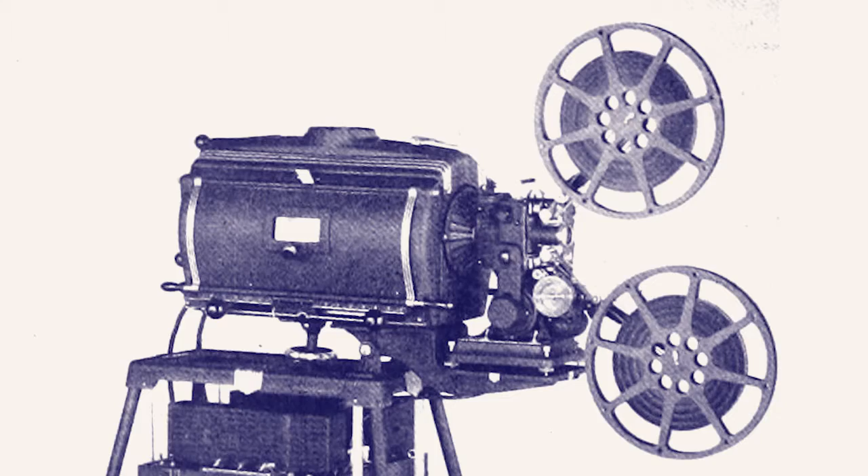Places of exhibition included meetings of local community clubs, schools throughout the community, factories of all types, and movie theaters or public auditoriums that were equipped with 16mm projection equipment. If the film was shown at a theater, it would have been incorporated into a movie program and exhibited as a short subject prior to a feature film.

Individuals who attended screenings of the films were also treated to a complimentary souvenir booklet which featured colorful, vibrant artwork depicting scenes throughout the film to help summarize it.

Since the film was made specifically by the Standard Oil Company of Indiana and not by any of the other Standard Oil companies, it was only exhibited in the Midwest states where the company marketed and sold their gasoline, which included Indiana, Michigan, Illinois, Wisconsin, Minnesota, North and South Dakota, Iowa, Kansas, and Missouri. By 1948, the Standard Oil Company of Indiana also acquired Montana, Wyoming, and Colorado to sell their gasoline in.

Unfortunately, individuals who lived outside of these states were deprived of seeing this masterpiece. However, the general public and Standard employees in the Standard Oil Company of Indiana's territory were in for a real treat, as this was a wonderfully made production which contained all kinds of showmanship tricks commonly found in the films made by the Jerry Fairbanks studio.

The Jerry Fairbanks studio was owned and operated by a rather fascinating gentleman named Jerry Fairbanks. Mr. Fairbanks was a very ambitious filmmaker, a showman, and a man who contributed greatly to our motion picture heritage. He was also a licensed airplane pilot, who would frequently fly to do location scouting for his films, shoot footage, and also check up on his various film shoots being done on the North and South American continents.

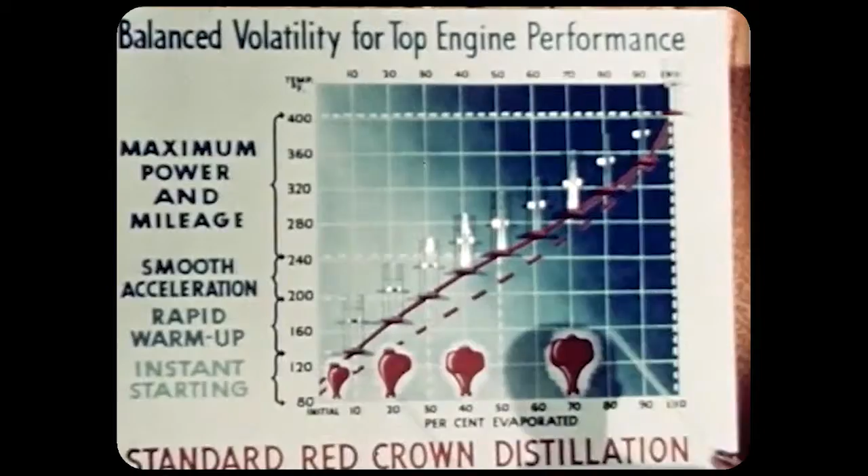Molecules with film personalities are at work telling the inside story of modern gasoline. They appear in sound and color in the new 16mm picture completed by the Standard Oil Company of Indiana. Audiences seeing the picture will come away knowing how gasoline is made, what gasoline is, how it performs, and how specialized it has become in supplying greater and more economical power for automobiles today.

Other trade magazines, such as Chemical News Parade, thought very highly of the film, especially the cartoon sequences. After viewing the film on my own, I can honestly agree with the trade ads that while the film is great, it's really the cartoon animation that steals the show.

The cartoon animation is a lot of fun. As a matter of fact, it's right on par with the theatrical cartoons that were being produced by the major Hollywood cartoon studios at the time.

One specific trait that was put to full use in the animation as an educational aid was the use of color. The film, which made use of Kodak's then-new 1948 16mm commercial Kodachrome, utilized color as a way to differentiate specific molecules. This filmmaking technique, which was raved about and highly applauded in Business Screen magazine and the Chemical News Parade, allowed audiences to easily follow and understand certain processes, such as how crude oil was separated into the various different petroleum-based products.

Now, unfortunately, I don't know exactly who is responsible for the animation in this cartoon, as the film does not have any credits indicating who did what. The only person who is technically credited is Jerry Fairbanks, who was the executive producer of the film. However, after consulting with a few different animation historians such as Jerry Beck and Don Yowp, and also doing some research on my own, I think I may have a pretty good educated guess on at least two different individuals who may have contributed this asset to the film.

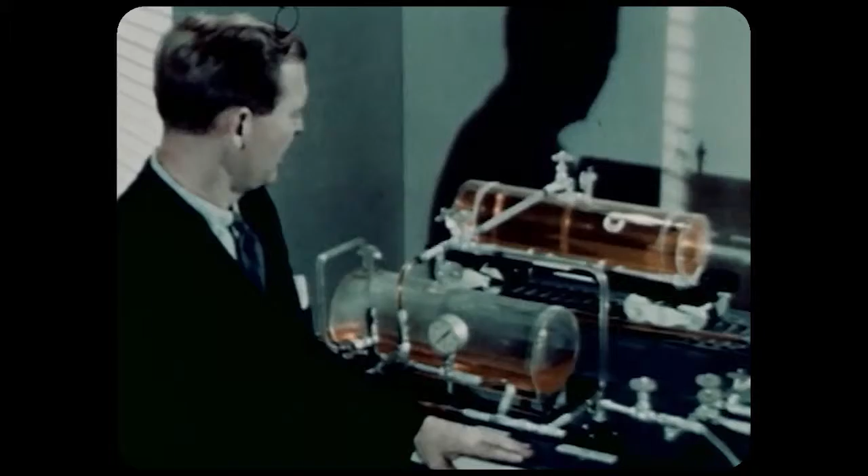Mr. Heiston, unlike Ken Carpenter, was not on the Jerry Fairbanks payroll, and therefore was not featured or used in many of Fairbanks' films. Around the time the Standard Oil productions were made, Mr. Heiston was a radio announcer for various programs that were produced by NBC. In addition, he was also a narrator for various film productions that were either sponsored or non-sponsored films.

One other audio asset that not only adds to the animation but also to the live-action footage is the musical score. I personally love the musical score to this film. It was composed by a gentleman by the name of Eddie Paul. Mr. Paul was the musical director at the Jerry Fairbanks studio and did the music for all of the studio's films.

Paul was also one of Jerry Fairbanks' best assets in that he used music to really animate and bring out the best in Fairbanks' films. Many, if not all, of Paul's scores composed for Fairbanks' films have a rather cartoony sound to them, as they utilize all kinds of public domain tunes, folk songs, classical music, and other well-known tunes.

Paul applied this technique to the score he composed for the Standard Oil films, as he incorporated tunes such as Ding Dong Bell, Puss Fell in the Well, Mary Had a Little Lamb, and also Turkey in the Straw, to name a few.

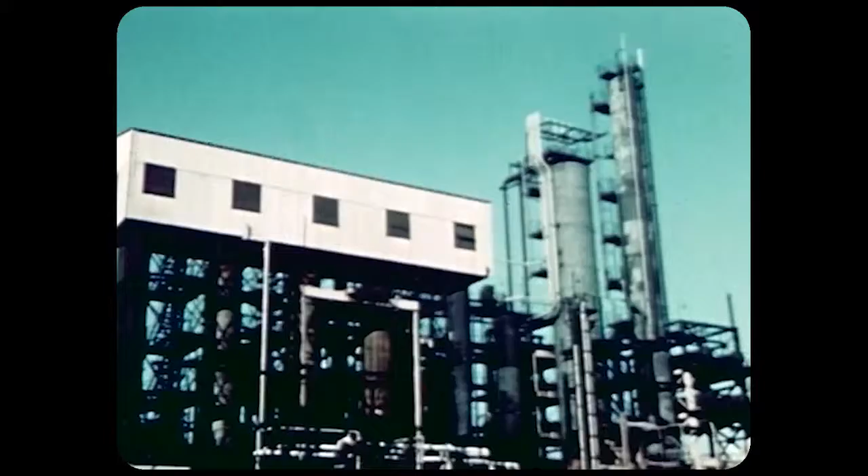All of these shots were framed up utilizing the new 16mm Mitchell professional camera, a camera produced by the Mitchell Camera Company. For those unfamiliar with the company, it made 35mm motion picture cameras considered the standard for film production in Hollywood. The vast majority of motion picture studios used Mitchell cameras for film production.

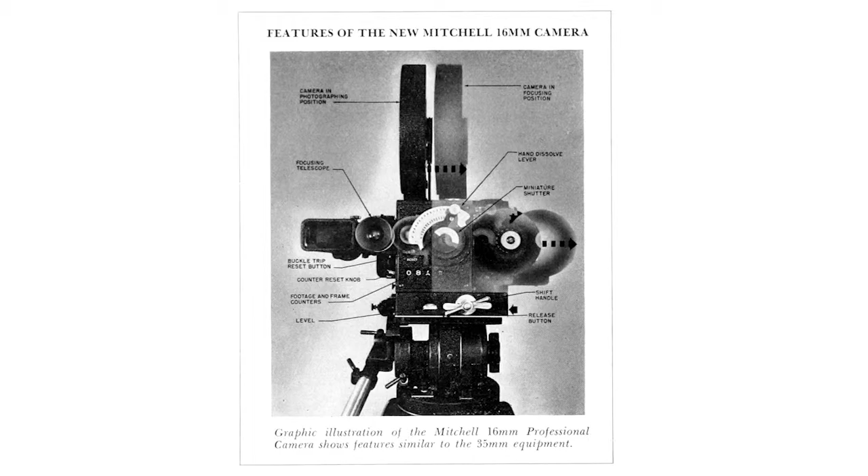The 16mm camera was introduced in 1945 and was described by several trade ads as a brother to Mitchell's 35mm camera. Due to its unique features and capabilities, it was confined to the United States Army and Navy for use in World War II.

The following year, in 1946, the camera was finally made available to civilians, where it received rave reviews from several different trade ads and filmmakers.

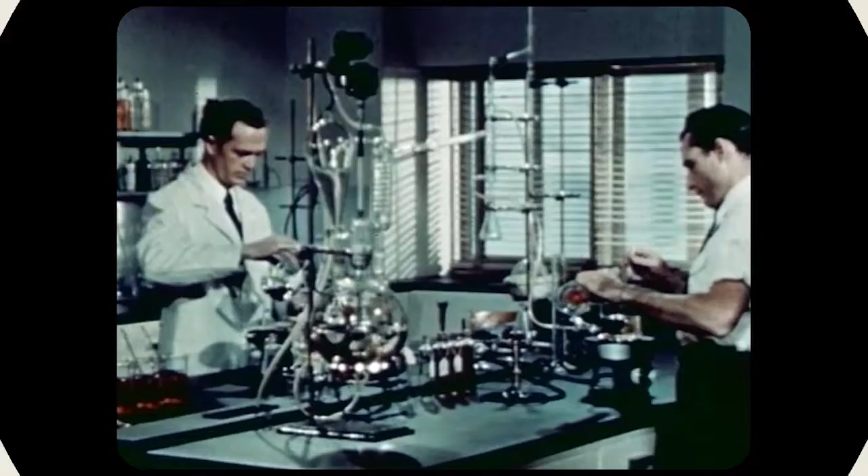One studio that took an interest in using this camera was the Jerry Fairbanks studio, who began using it for their industrial films, such as The Inside Story of Modern Gasoline. According to Business Screen magazine, Inside Story was one of the first civilian films to use the Mitchell 16mm camera.

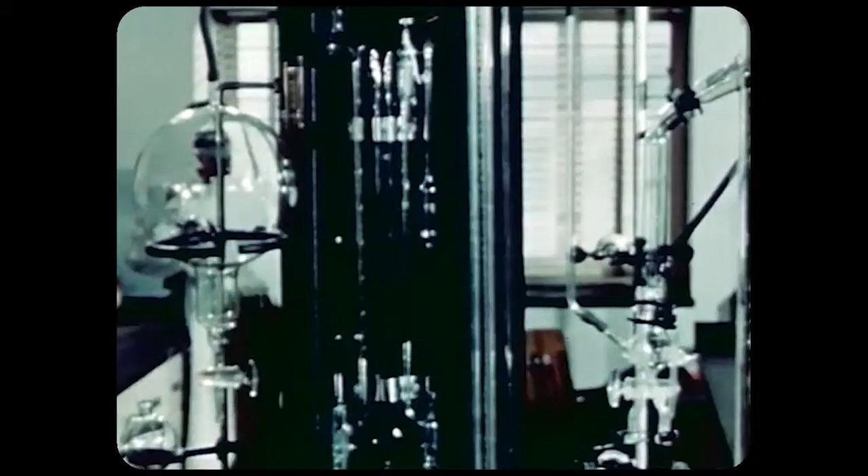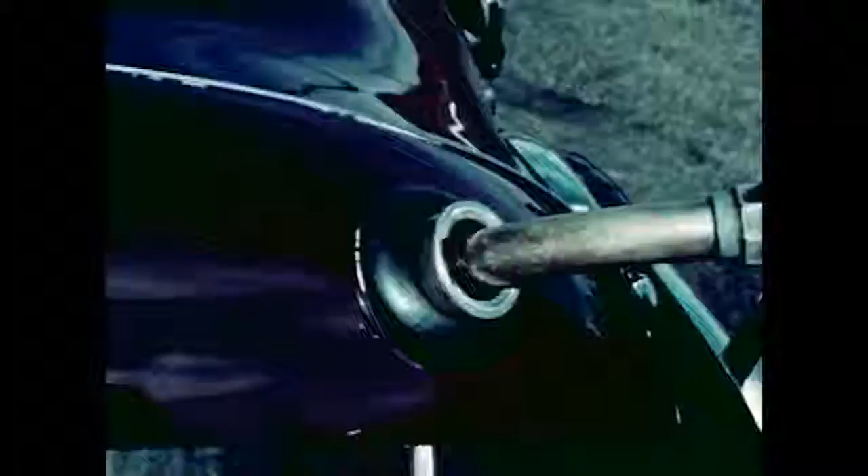Two great gasolines, Standard Red Crown and Standard White Crown, the fuels that power this modern age. On the highways, on the farm, and their kindred aviation fuels in the air. Here is the inside story of these modern gasolines.

Hello, folks. I'm a carbon atom, and since I'm an essential part of each of the hydrocarbons in crude oil, I'm here to give you the inside dope on gasoline. I'm the smallest possible particle of carbon. Why, I'm so small, 1,000 billion atoms like me could dance on the head of a pin.

Scientists know I act as though I had 4 arms, and these fellows, the hydrogen members of this combination, have only 1 arm. We're going to form a molecule. Watch. I grab hold of hydrogens like this, then another carbon. In doing this, we make a kind of chain. See? When we're together, the combination is a hydrocarbon molecule, one of the many, many different hydrocarbons.

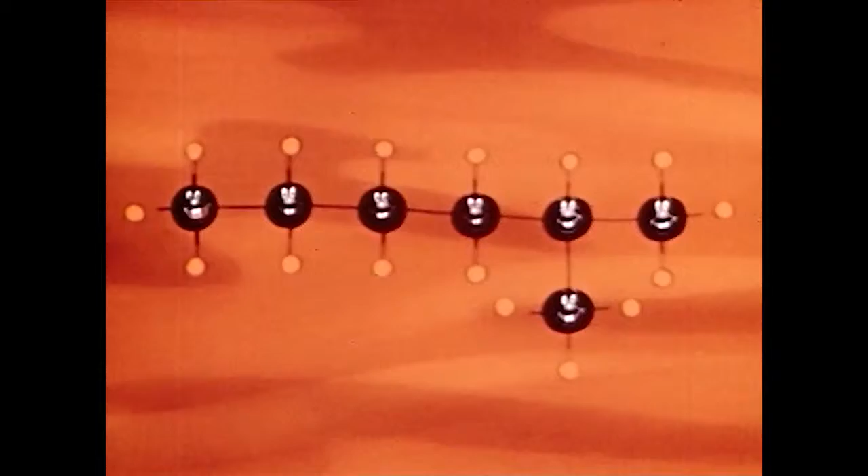For instance, we have formed a typical gasoline molecule. Now I want you to meet some of my relatives who form in the same way but have different patterns.

I'm another hydrocarbon, a gas molecule. My size makes me a typical kerosene molecule. I'm one of the fuel oil molecules. A light lubricating oil molecule, that's me. I'm a heavy lubricating oil molecule. All of these carbons and hydrogens make me a residual materials molecule.

So you see, there are lots of different molecules, different sizes, different shapes, all found in crude oil, still the best raw material for the great motor fuels of today. From it, science builds gasoline, selecting the groups of molecules wanted and changing their sizes and shapes as required. To do this job calls for great storage tanks to maintain a constant supply of crude oil, and batteries of pumps.

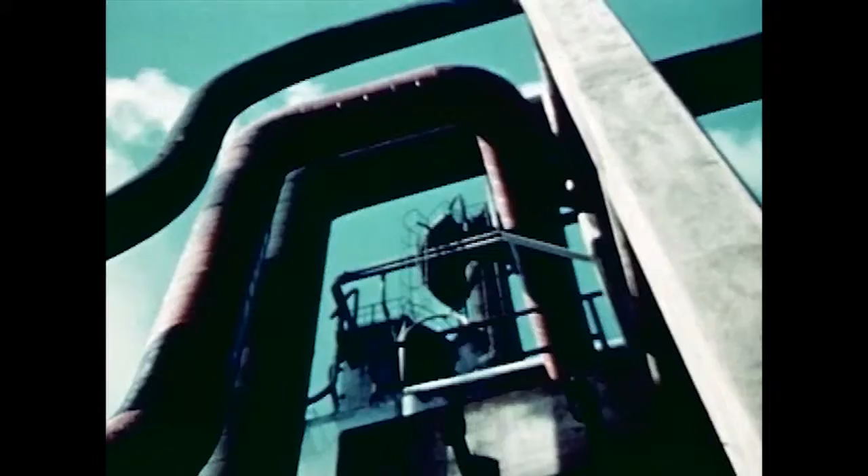A maze of valves and pipes. Mighty facilities, and an army of experienced, specially trained workers.

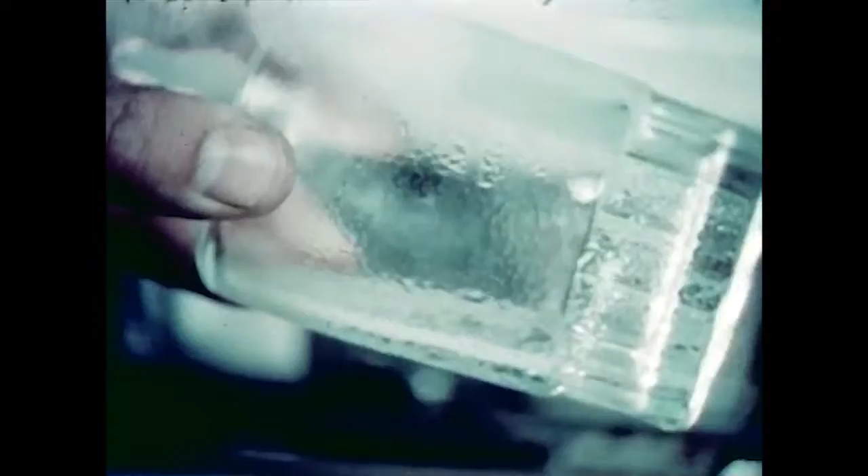The first step is to separate the crude oil into the parts you saw a moment ago. This is done by distillation. You know that when you boil water, the vapors can be condensed. The same principle is used in distilling crude oil. Giant units with bubble towers condense vapors just as the cold tumbler did.

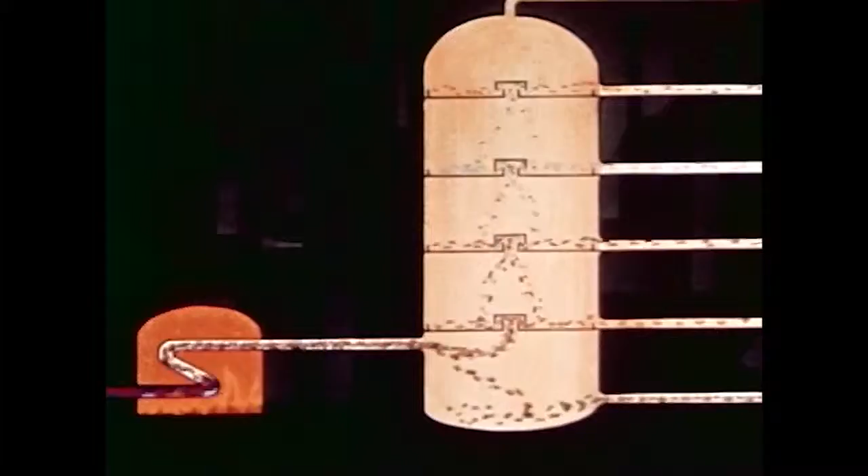Here in a single tower, much simplified, crude oil is separated into the different fractions needed for gasoline, kerosene, fuel oil, and other petroleum products. Here we see the crude oil being heated. Most of it is vaporized.

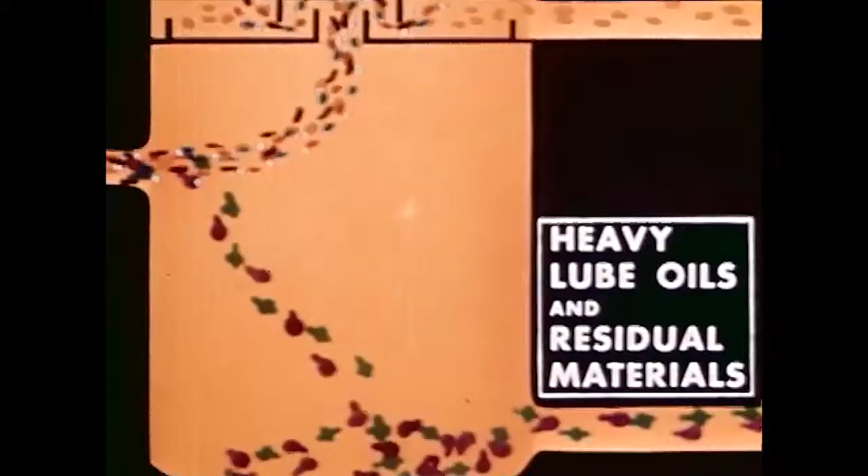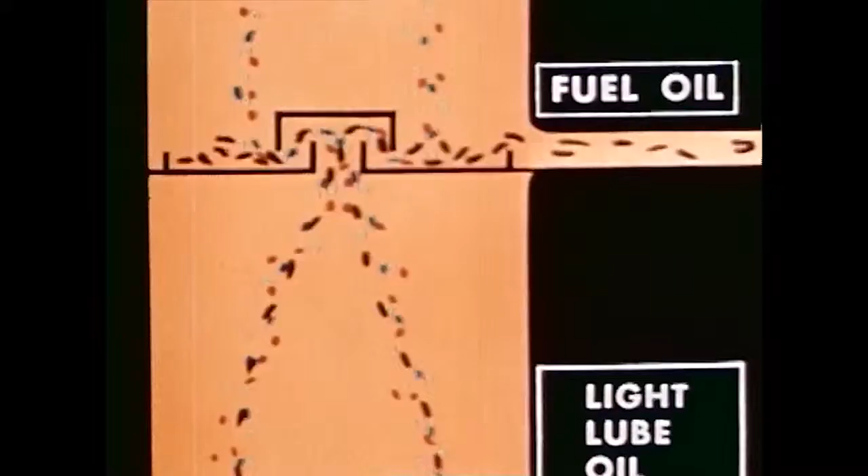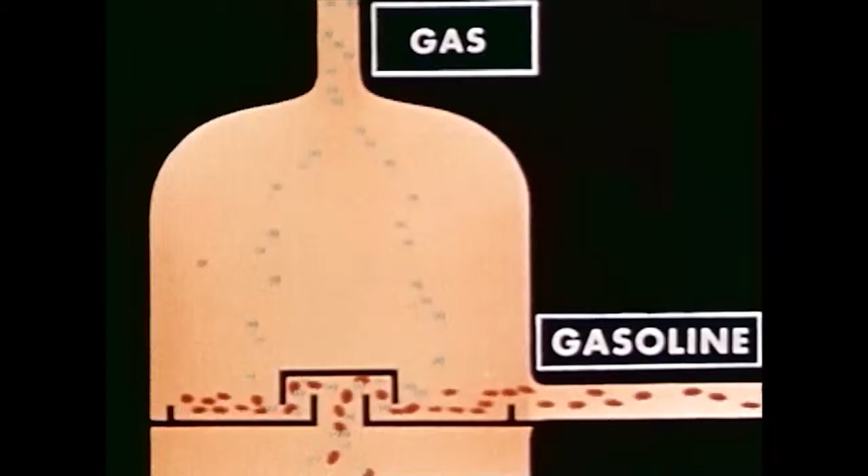At the bottom of the bubble tower, unvaporized large molecules of heavy lube oil and residual materials are drawn off. At the second level, the light lube oil is condensed out of the vapor and withdrawn. At the third level, the largest of the lighter remaining molecules condense to form the fuel oil cut. At the fourth level, kerosene is condensed and drawn off. At the fifth level, the gasoline molecules become liquid, leaving the very light gas molecules to go out the top of the bubble tower.

In the average crude oil, only a limited amount of gasoline is present. So let's see what we might get from this simple distillation. A barrel of crude oil produces 20% residual fuel oil and asphalt, 7% lube oil and wax, 39% gas oil and fuel oil, 15% kerosene, 1% gas, and gasoline only 18%.

Not nearly enough for today's millions of cars. But scientists of the Standard Oil Company, Indiana, invented the cracking process, enabling refiners to make more than twice as much gasoline from each barrel of crude. Today, were it not for the demands for fuel oil and diesel fuel, almost the whole barrel could be converted into gasoline.

By making more gasoline, cracking has conserved our natural resources and at the same time made gasolines of higher anti-knock quality for greater performance and economy.

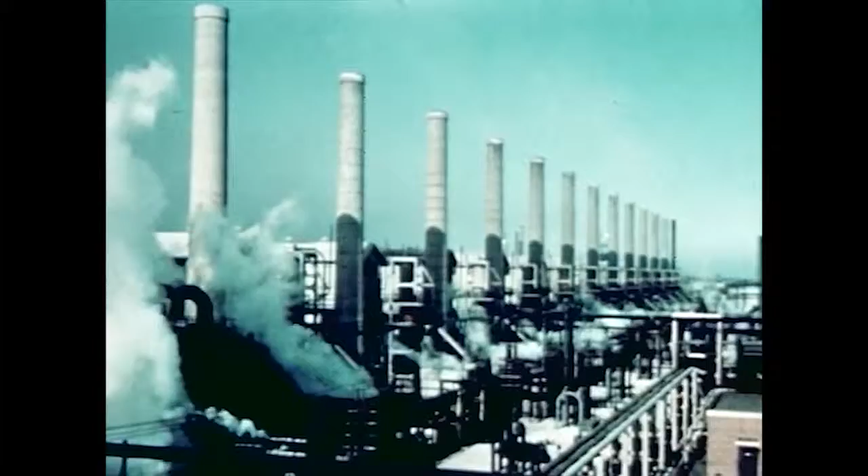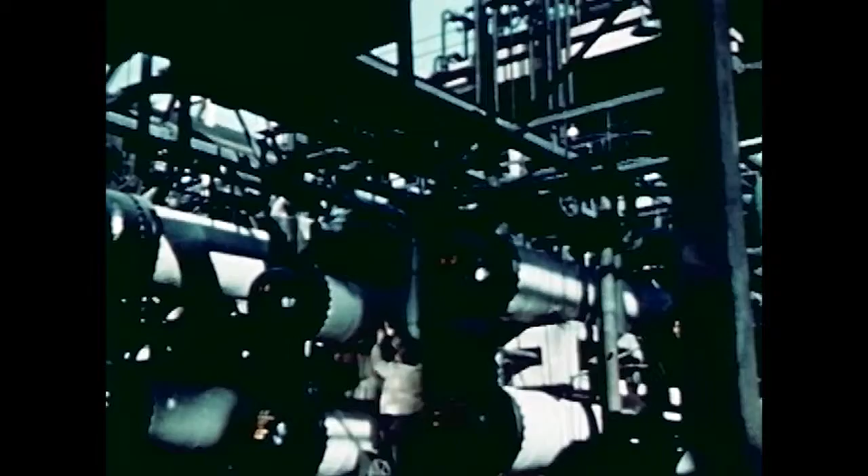Standard's continuing leadership was also strengthened by other processes. One is called polymerization. It simply takes molecules that are too small for gasoline, such as these gas molecules, and unites them by the polymerization process to form a larger molecule, a gasoline molecule of exceptionally high anti-knock value. Thus, science again fashions for us more and better products.

By a somewhat different process, this alkylation unit joins together two different molecules to make another high-octane gasoline component. And this unit, a hydroformer, changes the shape of molecules and takes out some of their hydrogen to make still more high anti-knock material.

Finally, a process where cracking is effected by a catalyst, a reaction promoter that itself remains unchanged. The most modern method uses catalysts in a fine powder that will flow like a fluid. Here's what happens inside a fluid catalytic cracker.

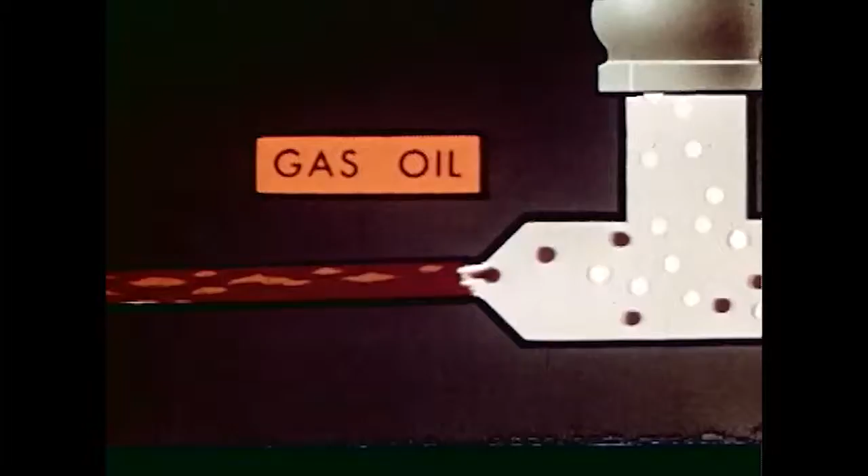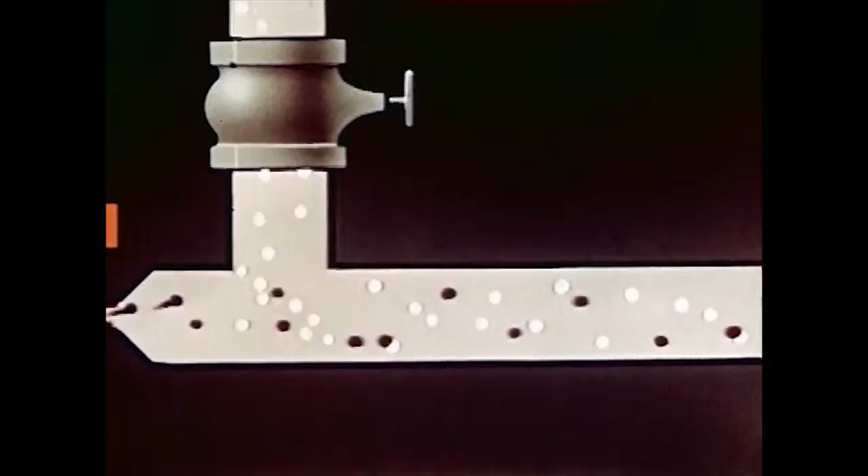Gas oil is heated. It is joined by the hot, finely powdered catalyst shown here as little white grains. The hot oil and the still hotter catalyst then move together through pipes up into a chamber called the reactor and are tumbled about. Here the heavy oil molecules are cracked by catalytic action to produce gasoline molecules shown in red. These move out at the top.

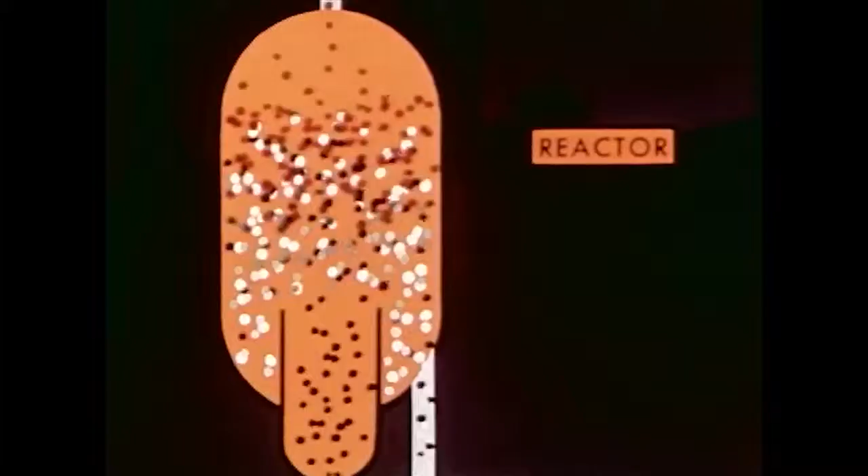As the catalyst becomes covered with coke, it becomes less active and is drawn off at the bottom. Air blows it through a pipe to the regenerator, where the coke is burned off. This reheats the catalyst, which again joins the flow of incoming oil.

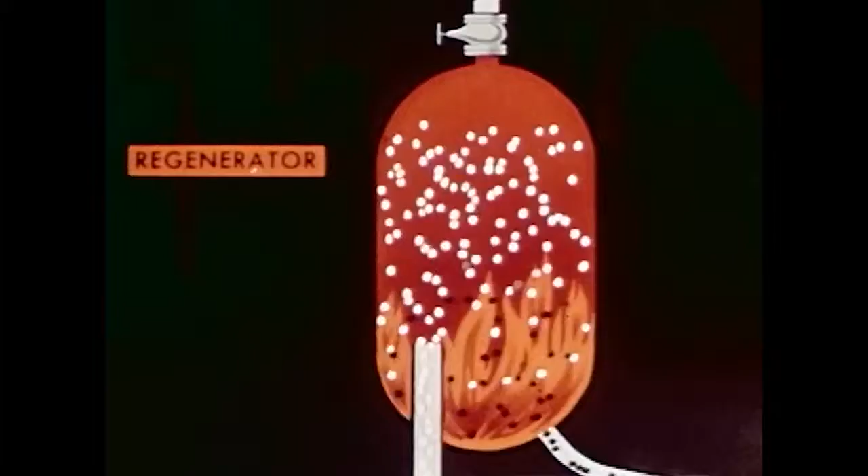Here's the entire operation, showing the complete cycle. Notice that the same catalyst is used over and over again in this, the most modern method of gasoline manufacture.

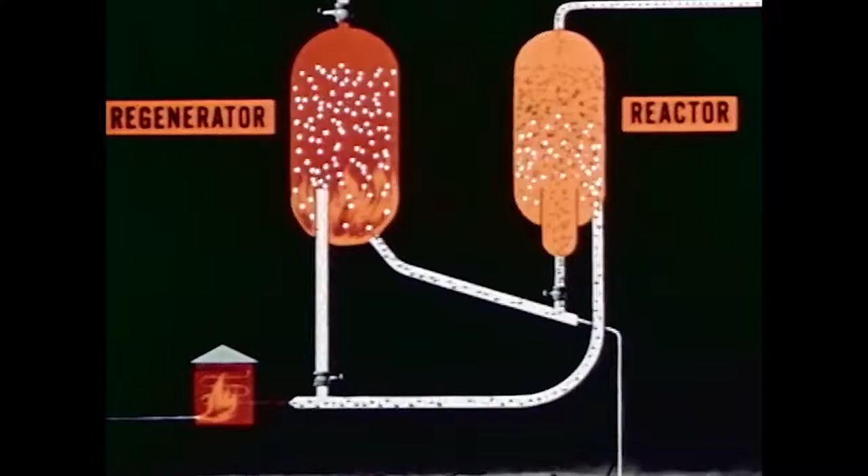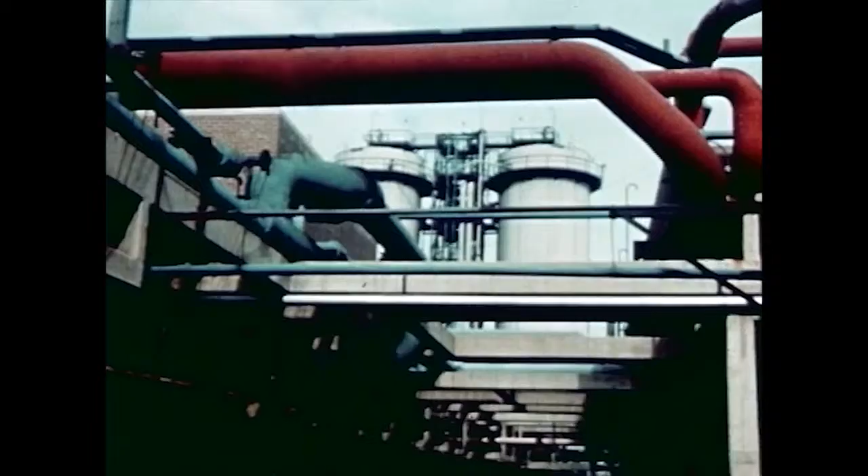It takes a complicated unit to do the job. Every 2 minutes, a whole carload of catalyst passes through the lines. 16 stories high, each of the company's big cat crackers can produce enough gasoline in 1 day to last the average motorist 1,000 years.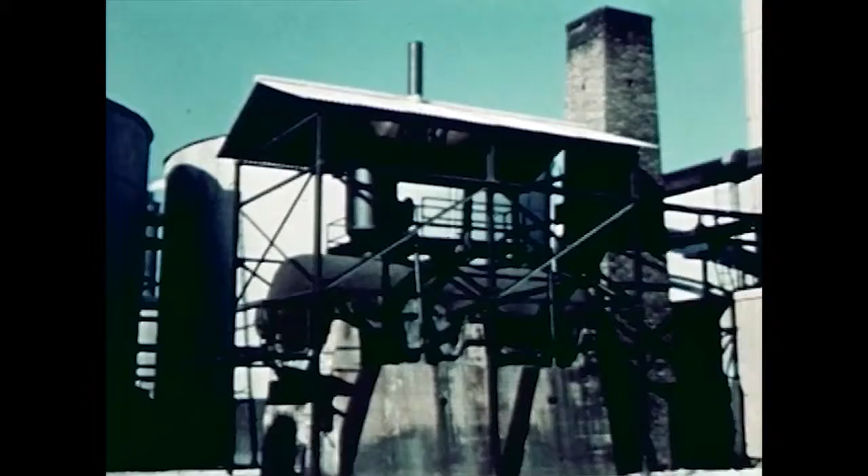Contrast the modern unit you have just seen with this historic Burton cracking still at Whiting, Indiana, the first successful commercial cracking unit.

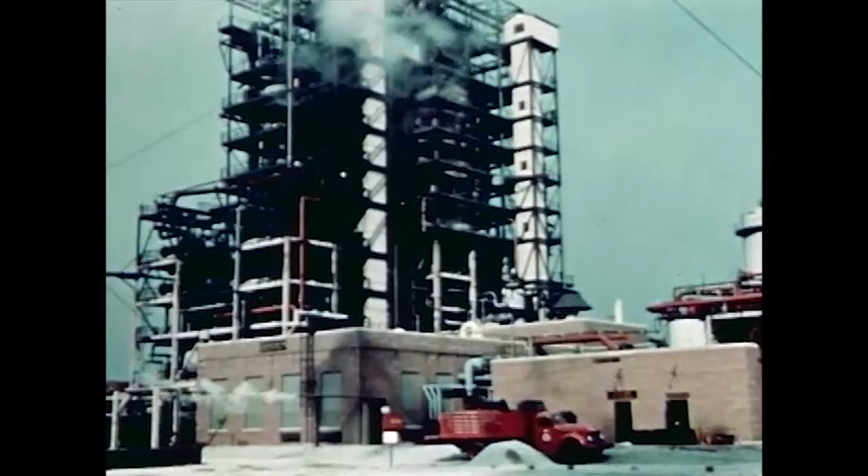Though the amount of oil in today's catalytic cracking units is actually less than in the old Burton units, the catalyst cracks the gas oil more than 7,000 times faster, and so permits much greater throughput. It is one more demonstration of leadership through science.

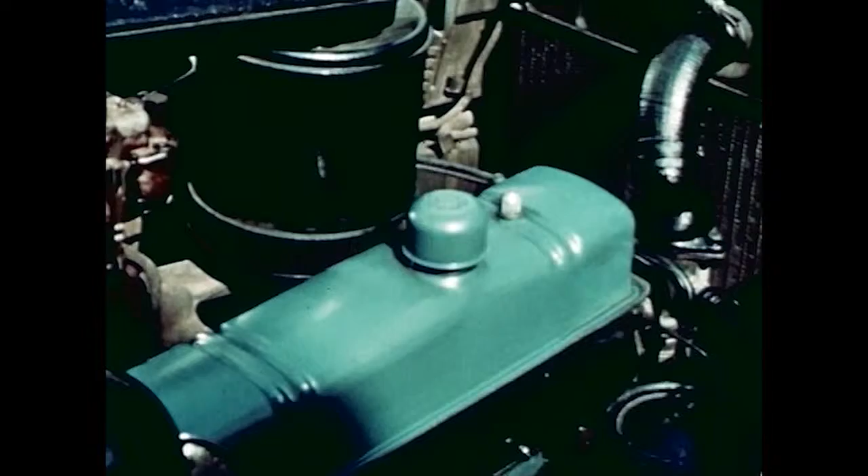To build top gasoline performance today, there are two major requirements: proper volatility and proper anti-knock quality. Let's take the first one, volatility, the tendency to change from liquid to vapor. The driver may not know a cat cracker from a firecracker, but he knows when his engine starts.

And he wants it to warm up without coughing and sputtering. But starting and warm-up are not the whole story. In all seasons, the motorist wants quick acceleration. He wants economy, too. Mileage, and that calls for a scientific balance of gasoline components.

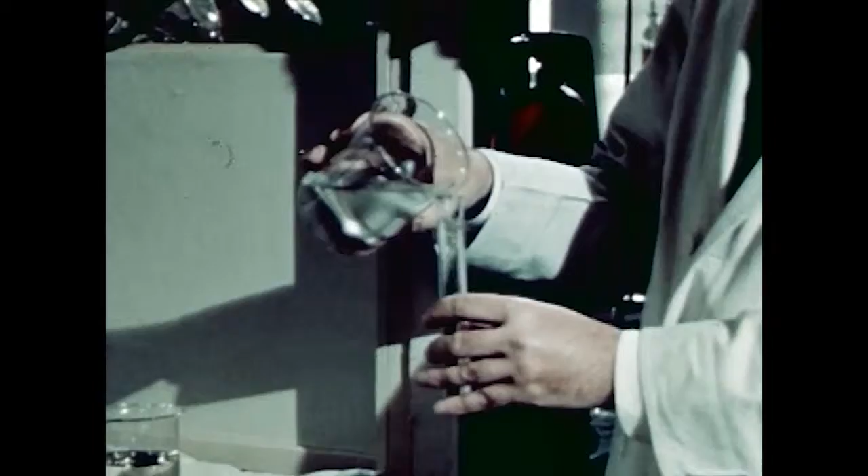You know how easy it is to ignite gas, which is made up of small molecules. Here's a mixture of liquid hydrocarbons so light and volatile that the heat of a hand will make it boil. It's inflammable and so volatile it ignites plenty fast.

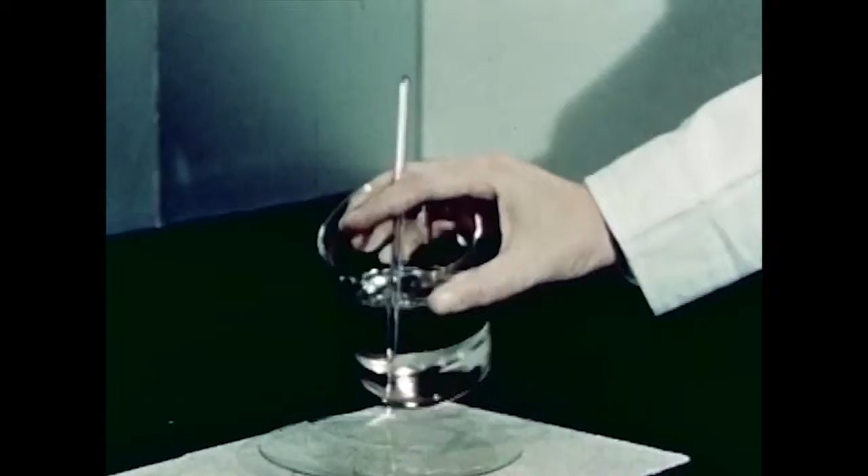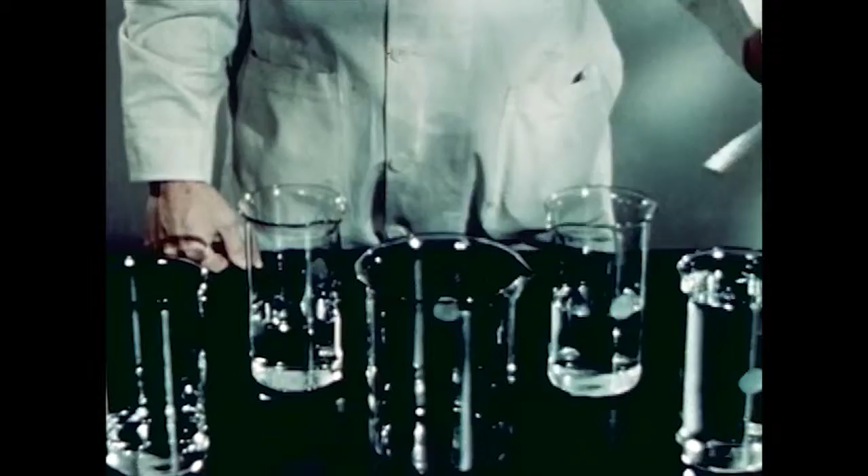Now here are some of the heavier, less volatile hydrocarbons. The lighted taper does not ignite them, yet when vaporized and burned in an engine, they pack a lot of power and give mileage. To make a gasoline blend that will have a proper combination of volatility characteristics, first we

put in the very light hydrocarbons for quick starting. The next heavier ones give rapid warm-up. Then some that give instant acceleration, and the final portion for full power and good mileage.

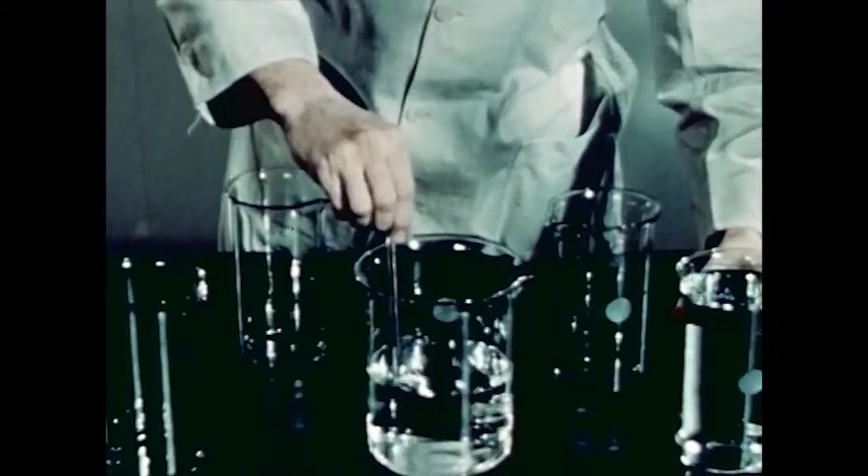The blended gasoline has the desired range of performance with economy because it contains just the right groups of hydrocarbon molecules: one for instant starting, but so active that in the summer it should be used only in moderation.

One for rapid warm-up. One for smooth acceleration. And one for full power and good mileage. Molecules that work together, a harmonious team.

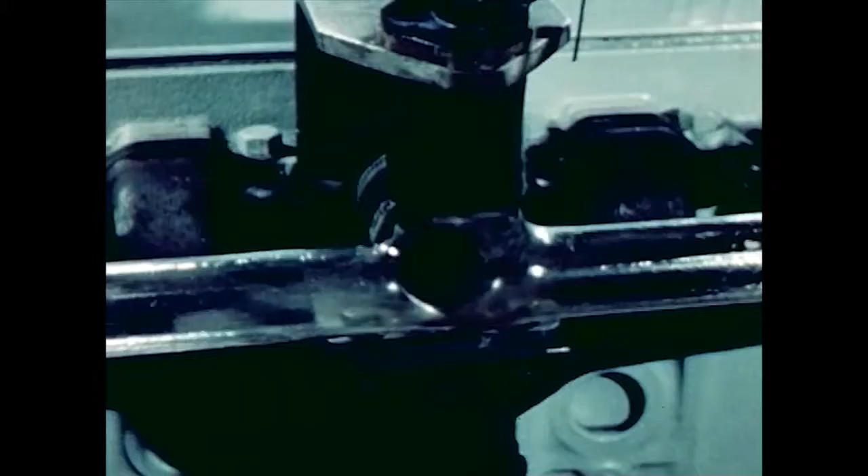In the engine laboratory, by means of a glass intake manifold, you can actually see one of the volatility differences between fuels. Slowing down the action, here's what too low volatility causes: a wet manifold and imperfect distribution. These liquid droplets decrease engine performance, waste mileage, and dilute the crankcase oil.

Switching to a fuel with proper volatility, vaporization is complete and there's no waste. To assure trouble-free performance at all times, fuels are tested out on the road as well as in the laboratory, in all types of engines and under all of the different seasonal and climatic conditions of use.

Under city driving, and trip conditions in hot weather and cold. Seasonal variations and the climates of different regions must be taken into account. That is why the Standard Oil Company, Indiana, adjusts volatility to suit the season and the region in which its gasolines will be used.

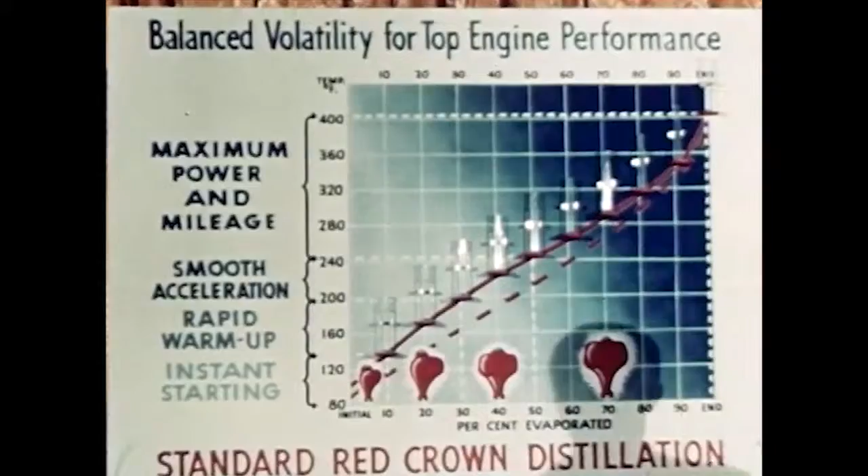A distillation test measures the volatility of motor gasoline. The results here plotted form a typical distillation curve for a gasoline of proper volatility.

Now for the next major requirement, the prevention of fuel knock. The motorist wants smooth, controlled application of power. Using a special demonstrator, I shall show the difference between poor performance and good performance.

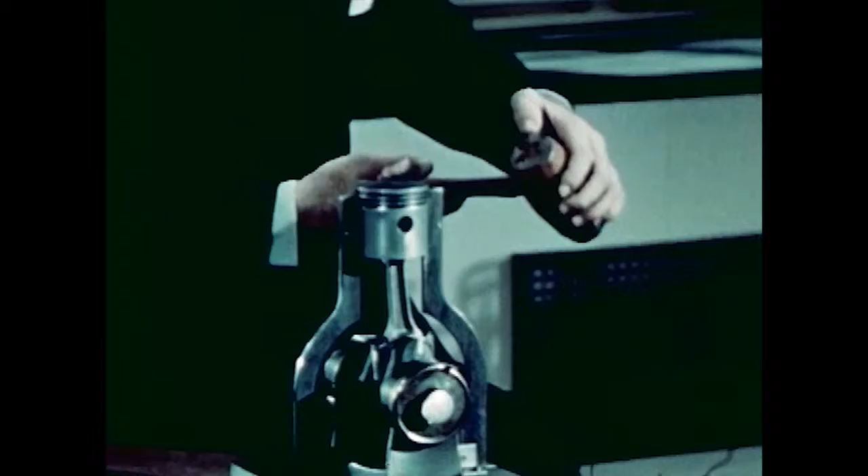Now, with the hard face of this mallet, I strike the piston. The piston, you see, receives a punishing rap, showing how power is wasted when gasoline knocks. This time, I shall use the cushion face of the mallet to show what happens when gasoline does not knock. Smooth, useful power propels the piston, sends the crank spinning.

The performance difference you've seen is a mighty important one that you ought to understand better. So let's look inside the engine by means of animation and see what happens when the fuel burns.

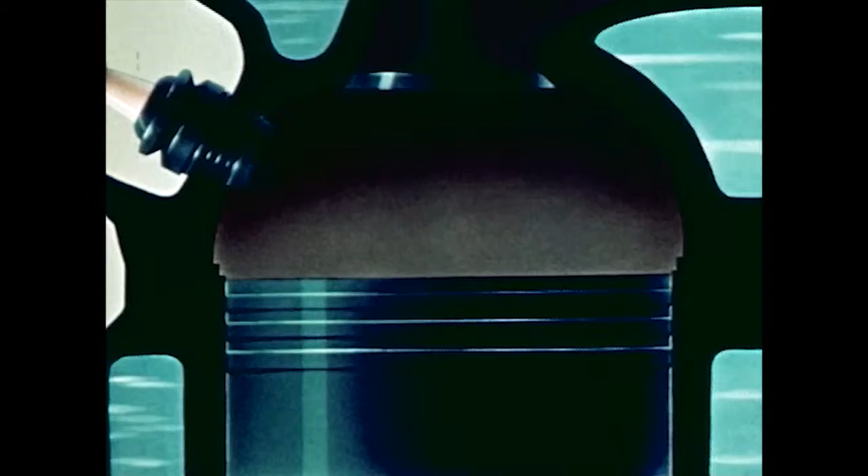These gasoline molecules have not been improved on or controlled by science. They are untamed and unruly. What you will see next actually takes place in about 1/500th of a second.

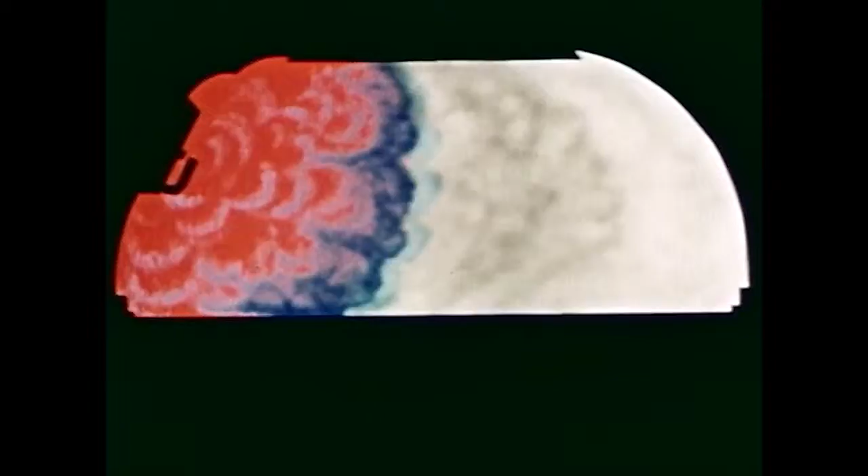First, the spark ignites the compressed fuel charge. Now, watch for the knock. In this greatly slowed down action, you could see that with this gasoline, combustion was uneven and uncontrolled, and at the end there was a jarring, violent explosion, a knock that pounded and shook the engine.

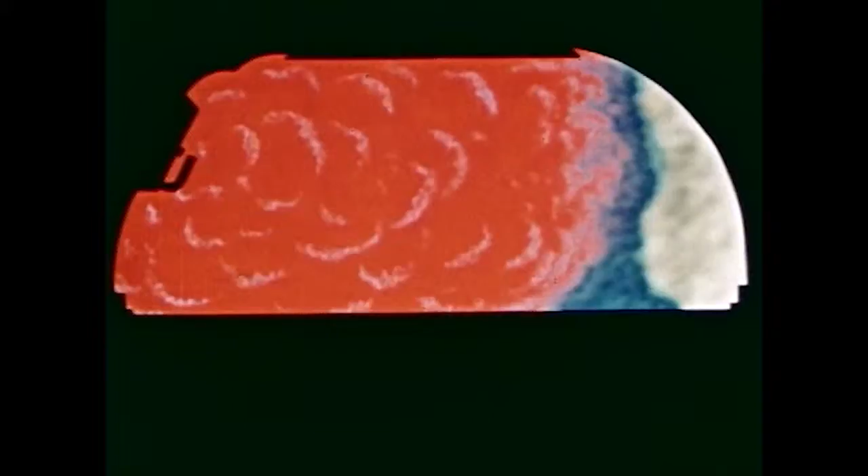Now we shall repeat the action. Watch again for the knock. Now, with gasoline made up of molecules that have been science-fashioned so that they have the required anti-knock quality, molecules that stay under control and work as a team, let's see what happens.

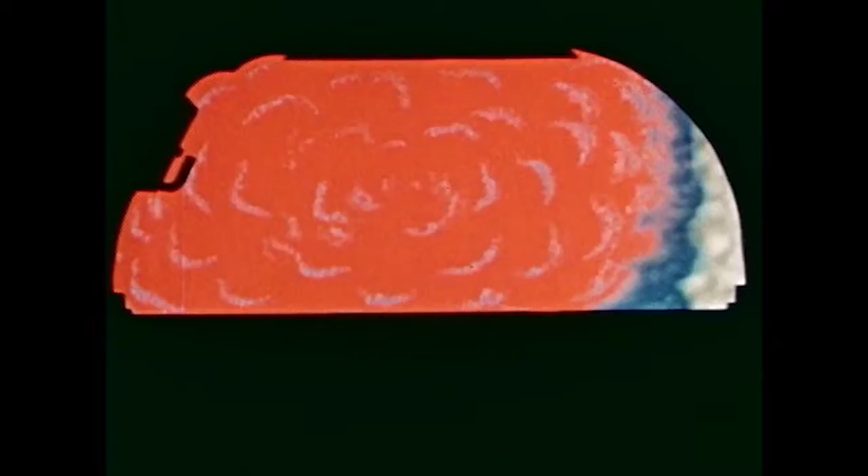Note in this case that the combustion is more uniform and there is no knock. The big difference, as you could see, is that with gasoline of the required anti-knock quality, there is no knock. Combustion is smooth and even and completely under control.

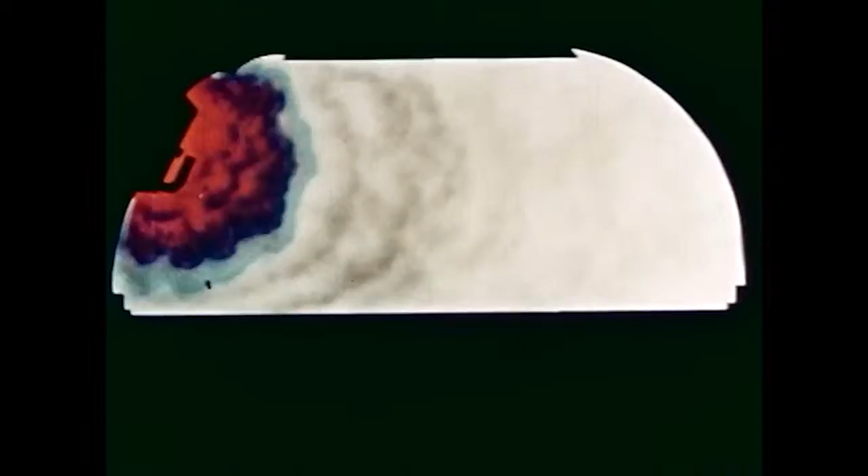Now we shall repeat the action. Watch how the combustion proceeds as it should, smoothly and without the interference caused by knocking.

In the modern high compression engine, modern gasoline gives the greater performance required today. The car accelerates more rapidly, climbs hills faster, travels more miles per gallon.

In addition to fashioning the molecules to prevent fuel knock, refineries usually add minute quantities of tetraethyl lead to help accomplish the same purpose. This model shows how just the right amount of fluid containing tetraethyl lead and dye is added to the gasoline.

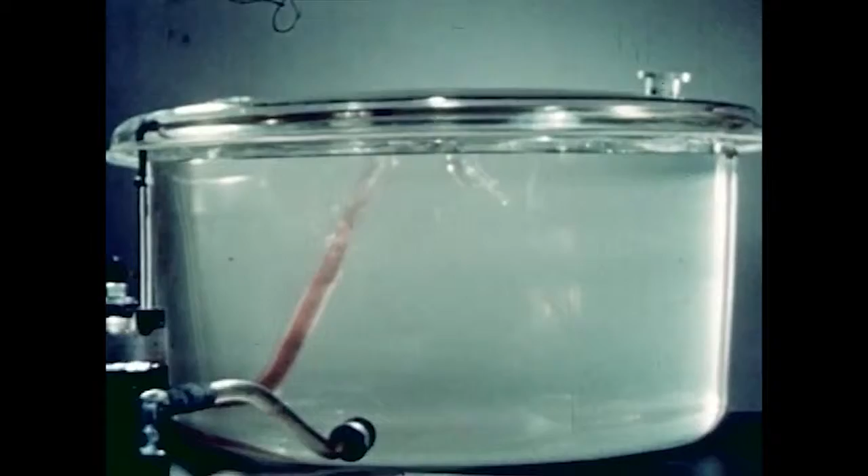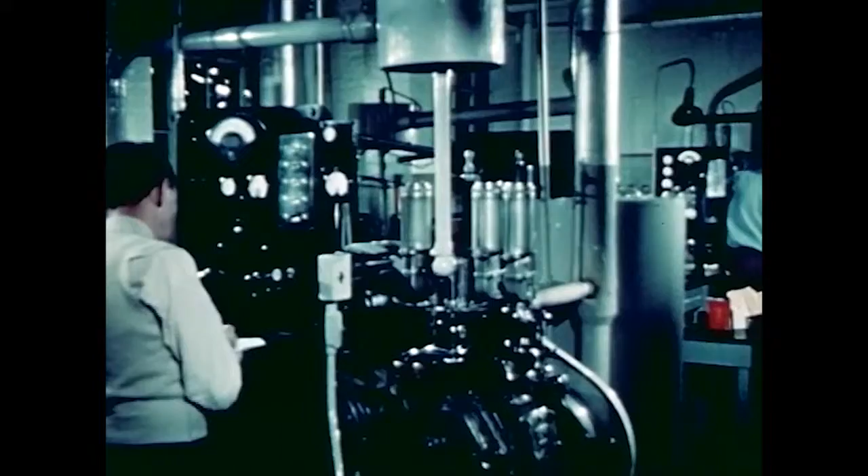In the knock testing laboratories, test engines are used to make sure that the proper anti-knock quality has been built into Standard Oil's gasolines. The high anti-knock reference fuel is called isooctane, hence the expression octane number.

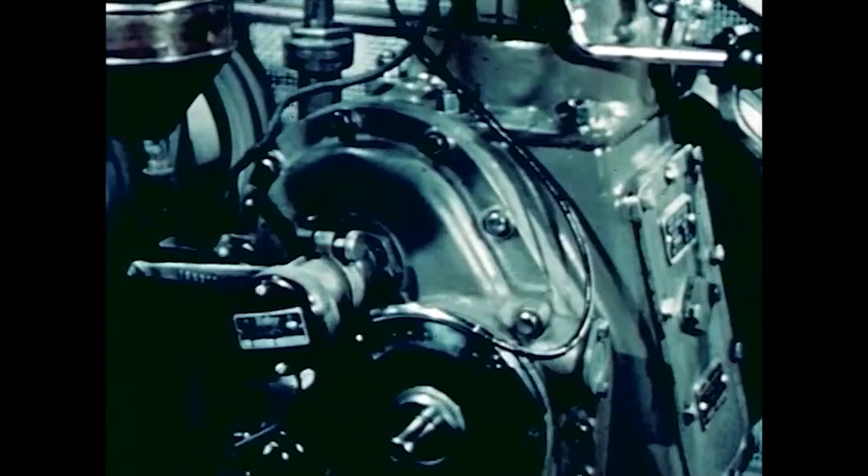This test engine is equipped with a dial indicator that shows just how badly the engine is knocking. With a fuel of low octane number, here's how it sounds. Switching to a high octane number fuel, the knocking diminishes and finally fades out completely.

This illustrates the smooth, even performance you get from standard red crown and standard white crown.

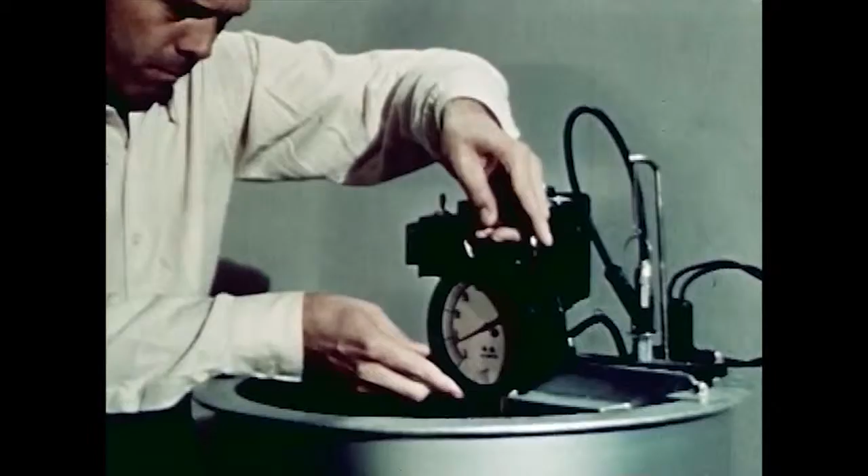The engineer has had his say, but modern processes and skillful know-how are not enough. There must also be safeguards. You can depend on it that Standard Oil Company, Indiana, constantly checks and inspects its fuels by every needed control test. For example, the vapor pressure test that controls vapor lock tendencies.

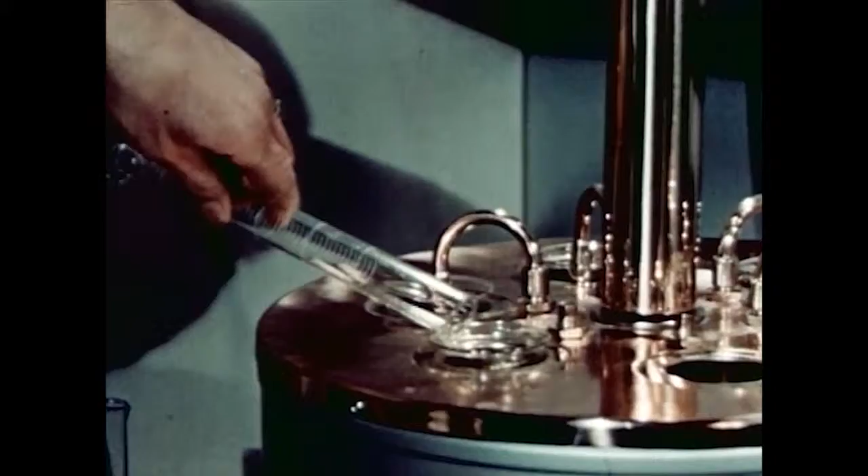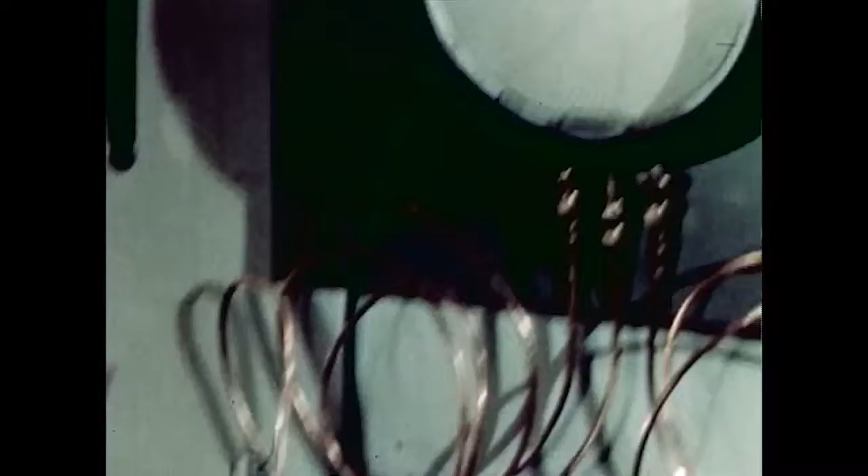A test to make sure there is no harmful gum. Another to make sure that today's fine gasolines will not deteriorate in storage. A test that guards against corrosive impurities.

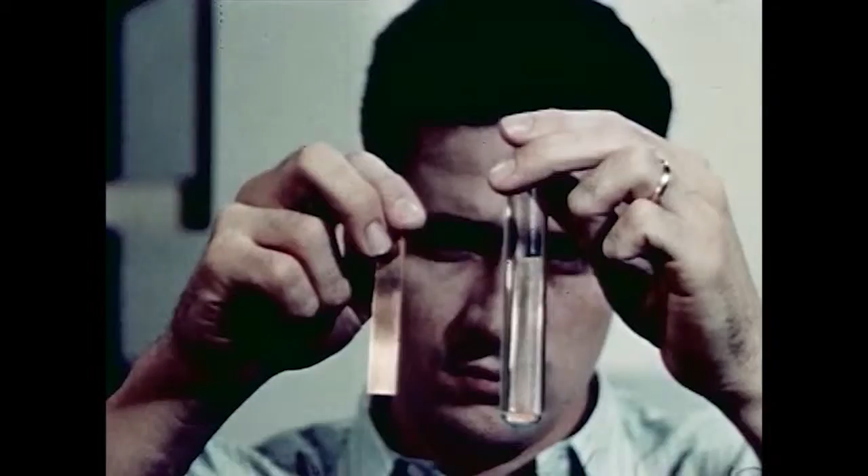Testing, testing, testing. Another of the 1,500 and more daily control tests.

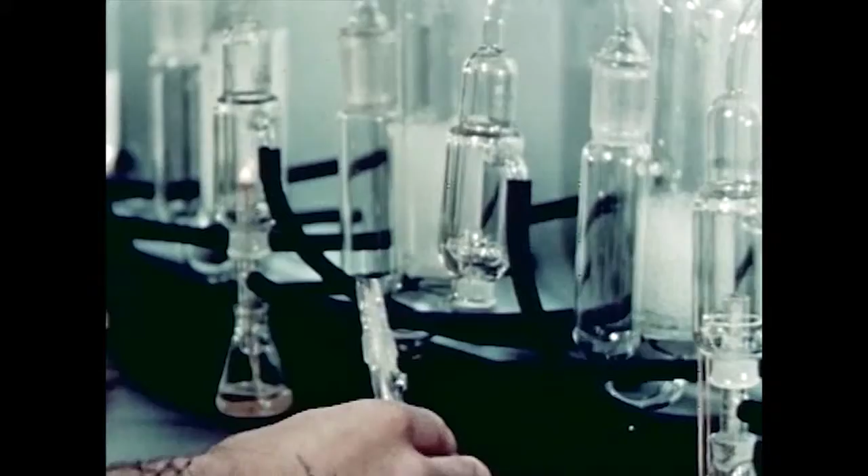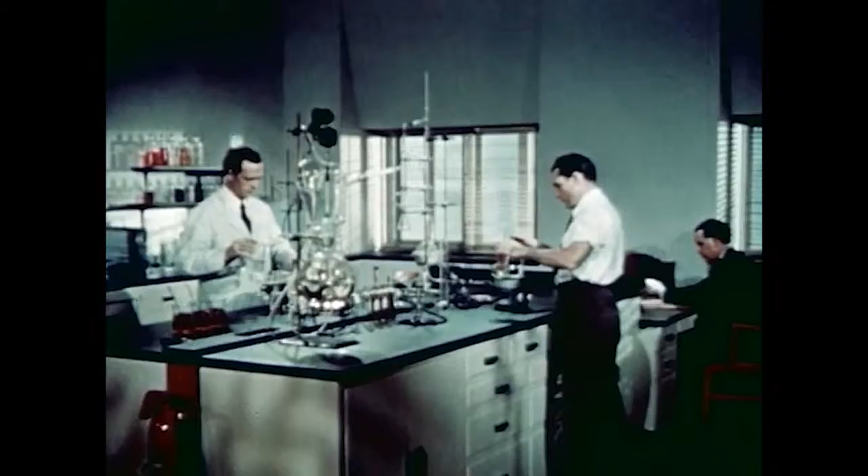In addition, these great laboratories are entirely devoted to extensive research, carried on by hundreds of capable scientists, working on more and still better products for the future.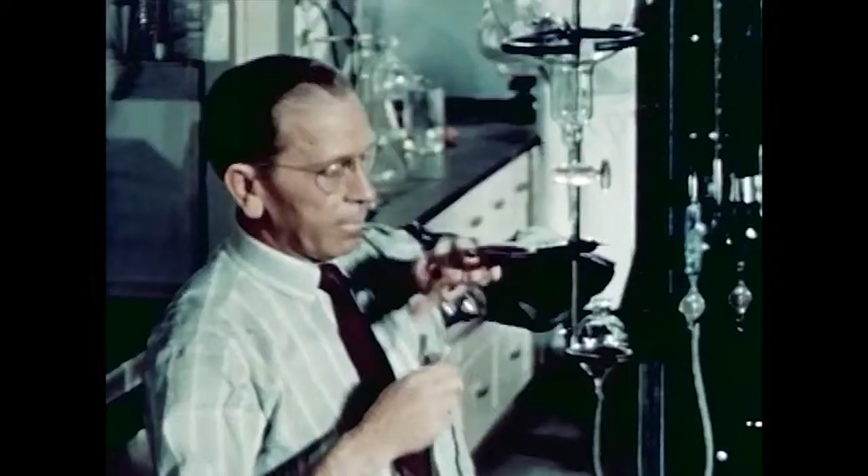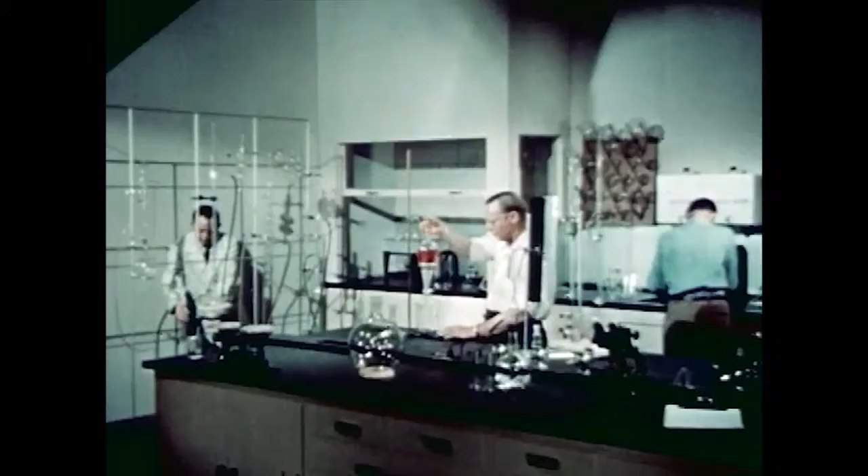Cooperative work with the automobile industry guarantees that the right gasoline will always be available for any car that's developed. Put all of this together and you have what it takes to deliver today's and tomorrow's great motor fuels.

Huge units like this super fractionator and the other multi-million-dollar units that go to make up the great modern refineries of the Standard Oil Company, Indiana.

With the tradition of pioneers behind us and better facilities ahead of us, future progress leading to still finer products is assured. So there's the story, folks, and I'm proud to be a part of it, even if only as a tiny atom inside modern gasoline.

This is what's behind the gasoline you sell, whether from tank truck or on the service station driveway. Behind these symbols of service is a great record of scientific achievement that certifies today's leadership and guarantees tomorrow's.

I think you'll agree with me that the animated molecules were certainly the show stealers of that production. Now, as I stated earlier, attendees of the film, both the general public and employees of the Standard Oil Company of Indiana, received souvenir booklets that featured the animated molecules discussing the inside story of modern gasoline.

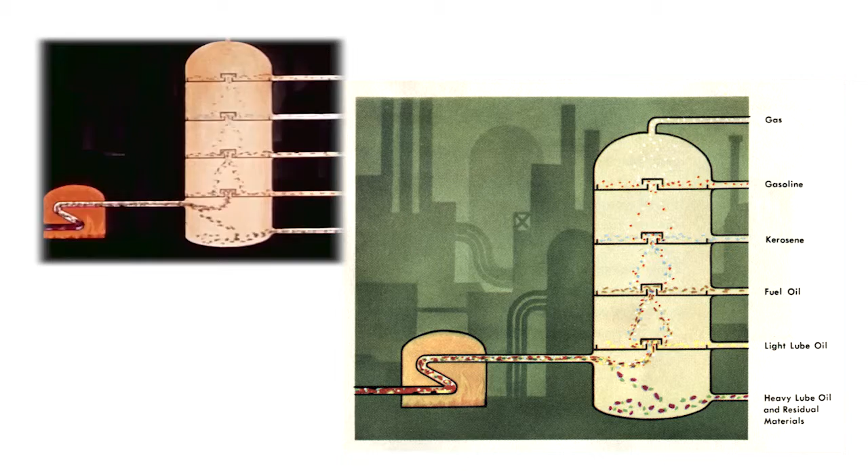The booklets contained colorful, vibrant artwork depicting specific animated scenes throughout the film. Like the film, the booklet makes use of color as an educational aid to depict specific molecules. Looking at this book, it's interesting to compare the artwork to the available print of the Standard Oil films.

As you probably observed, the existing 16mm print of the inside story of modern gasoline is kind of worn out. The artwork featured in this booklet allows us, the audience, to see what the original look and vision of the film was.

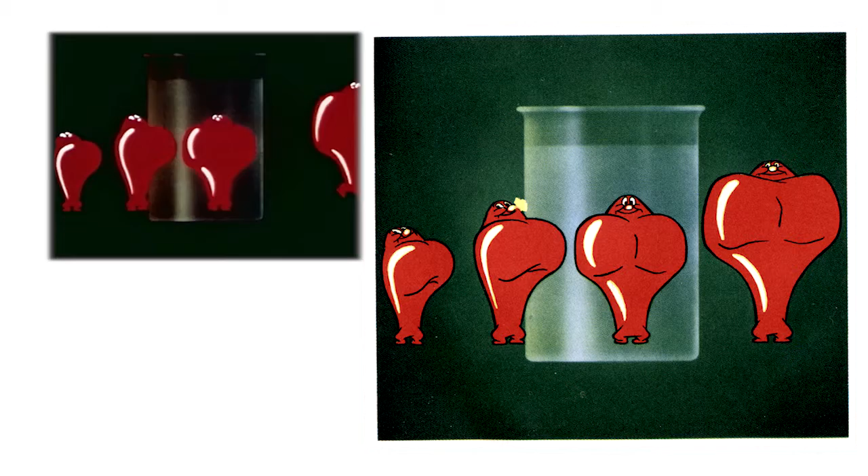Now, speaking of the animated molecules, one thing I didn't quite discuss in my introduction was who provided the voices to the animated molecules during the sequence in which we are introduced to Ken Carpenter's family of gas molecules. As you probably observed, none of the molecules were voiced by Ken Carpenter or Bud Hiestand. As a matter of fact, all of them seem to be voiced by different individuals.

Unfortunately today, nobody seems to know exactly who provided these voices. Several film historians such as Jerry Beck, Don Yowp and Keith Scott believe that several vocal artists and actors such as Stan Freberg, Frank Nelson, and Don Messick may have provided the voices to these molecules.